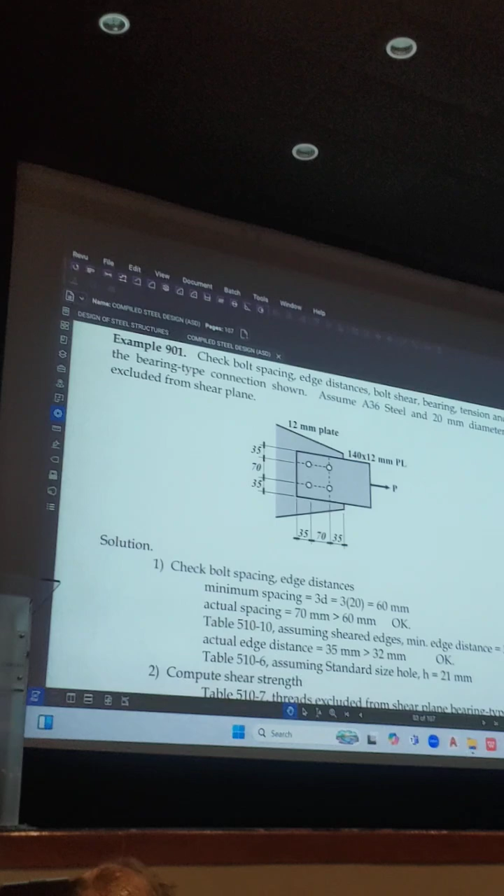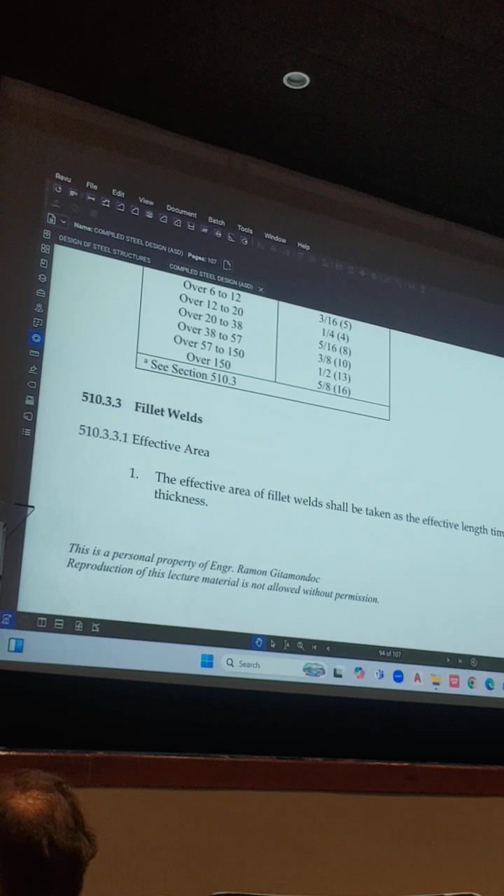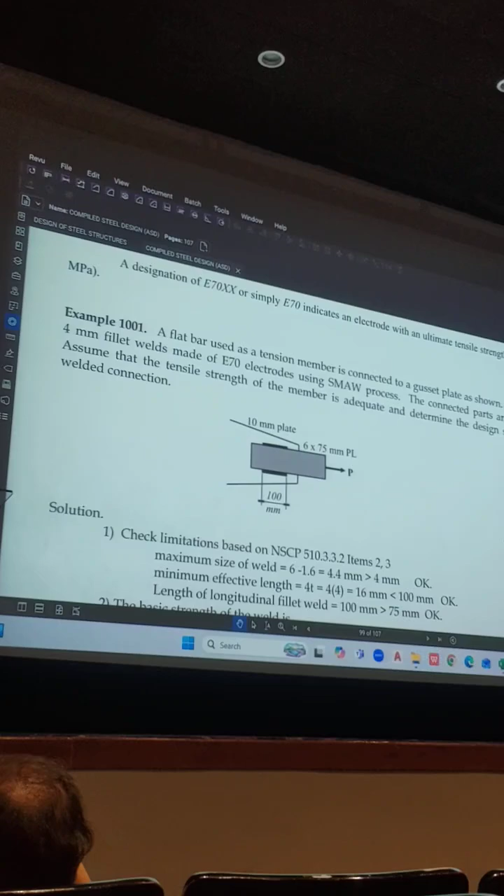Okay, welded connection. So we have sample problems here. Axially loaded members, welded connection. So what theory should we apply here?

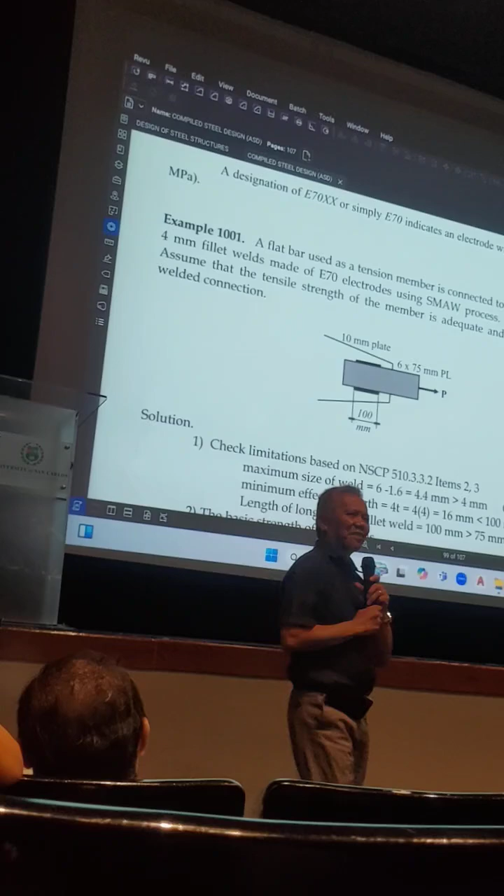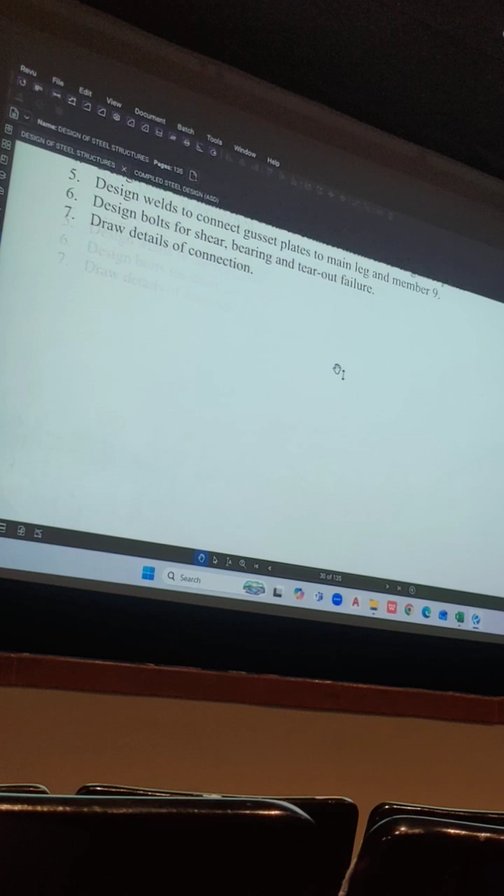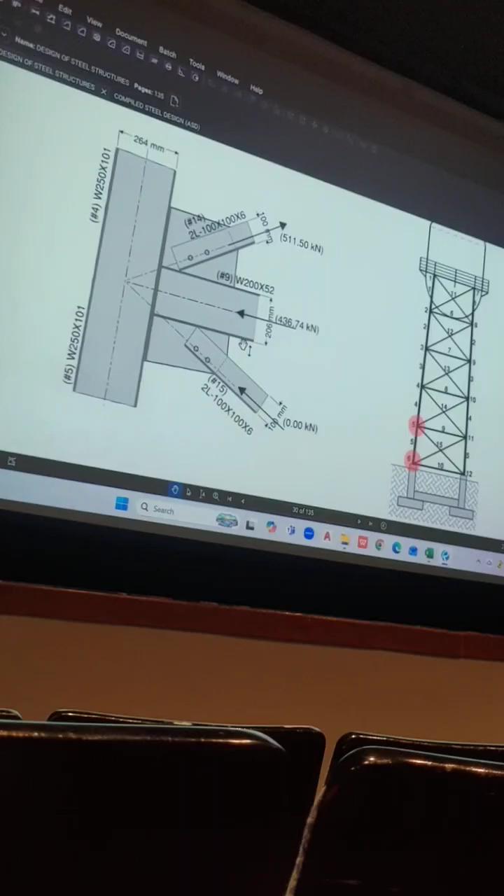This subject has good application, right? So the presumption at this level is that you already learned the theory. So you should be able to apply them, in specific situations.

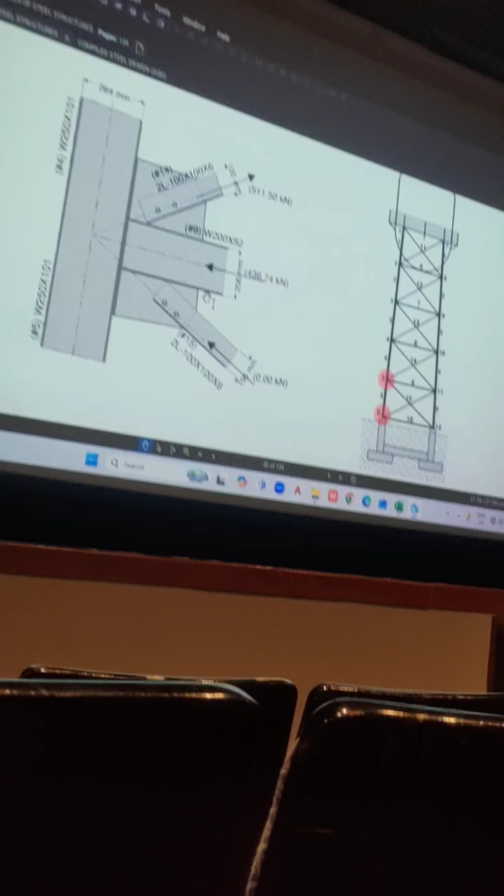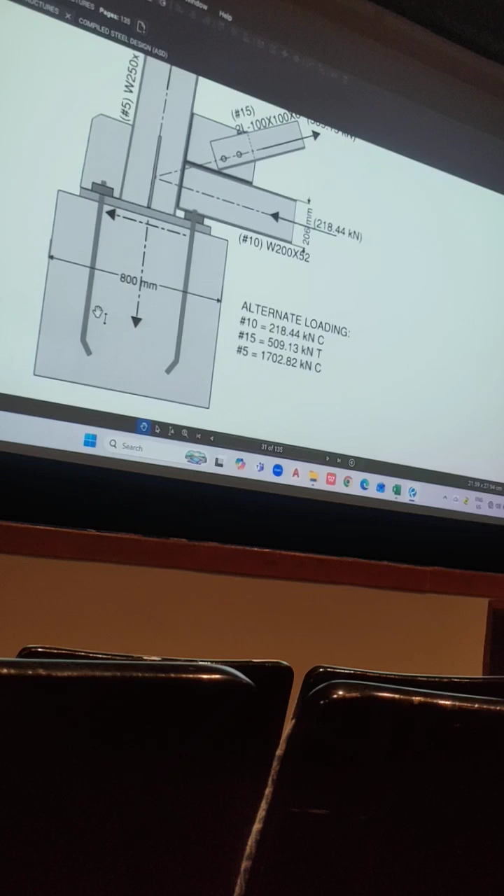This is the connection at the base. So what is your main leg? Here, horizontal diagonal member. And here's the base plate. The base plate is embedded into the concrete pedestal. Actually, not the base plate, but the anchor bolts are embedded into the pedestal.

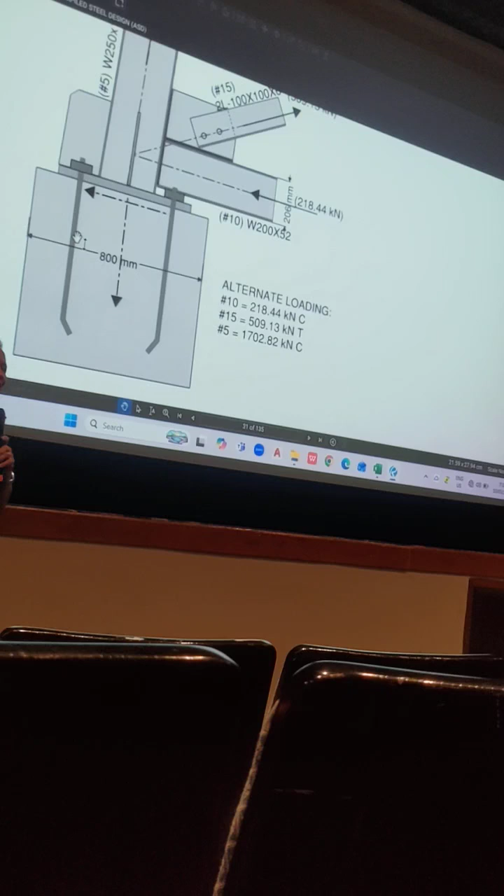So now you must be able to identify what forces the connection is required to resist, what stresses will occur in the connection, in a particular part of the connection. For example, the anchor bolts - what stresses act on the anchor bolts?

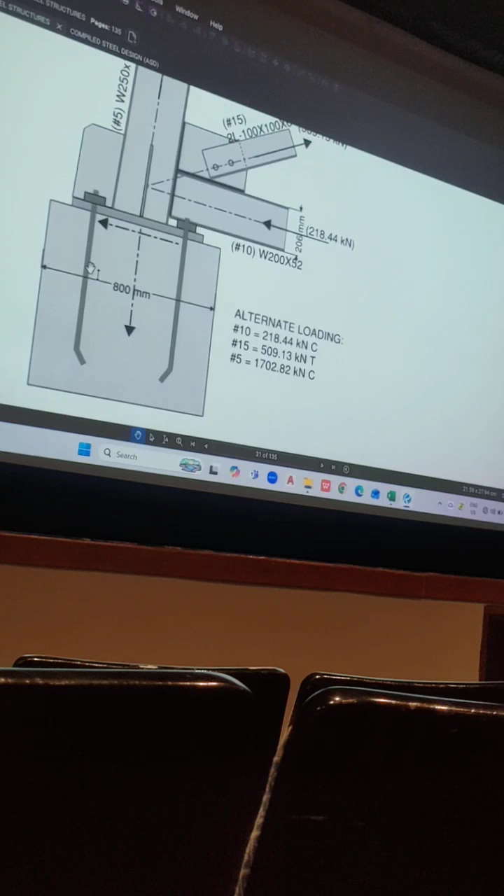Okay, there's horizontal force, so that will be resisted by the anchor bolts in shear. There's also tension, right? So the bolt will also be subject to tension. Okay, so that's for the anchor bolts.

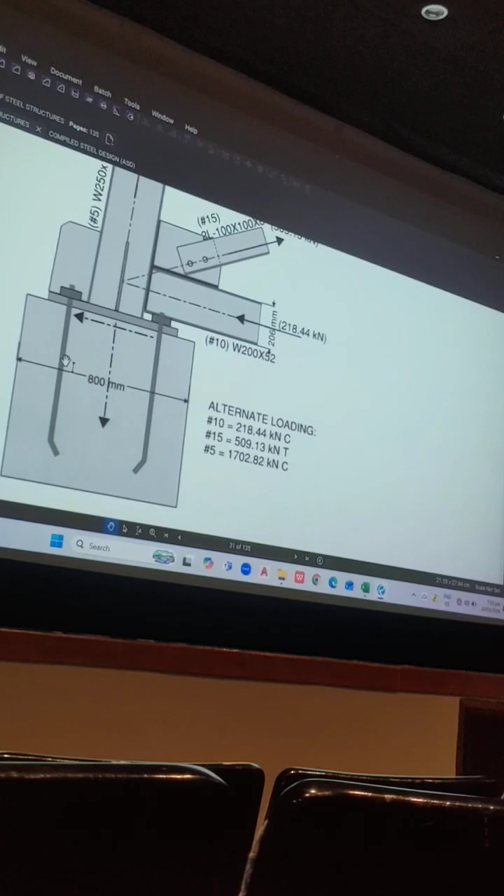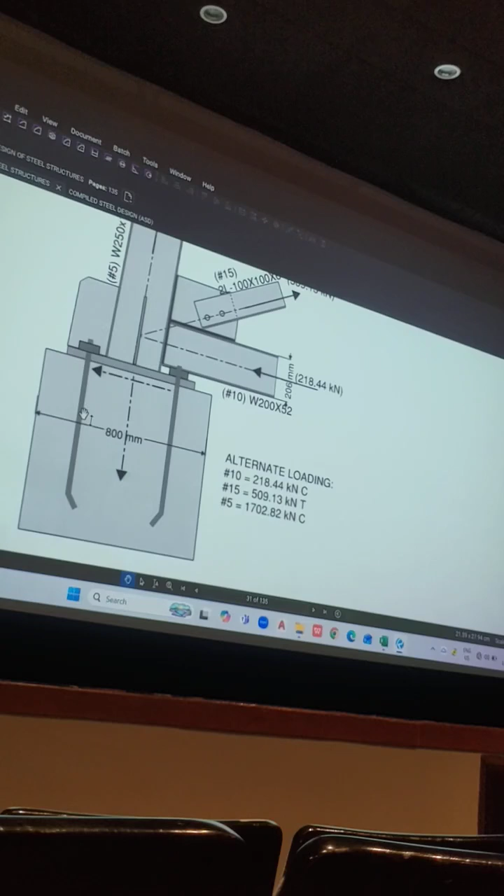For the base plate, you have bending. If it is uplift, the base plate will tend to bend downward. If you have compression in the main leg, then the base plate will be subject to upward pressure exerted by the concrete pedestal on the base plate. So you need to look at two situations: downward bending on the base plate when subject to tension in the main leg, upward bending on the base plate when you have compression acting on the main leg.

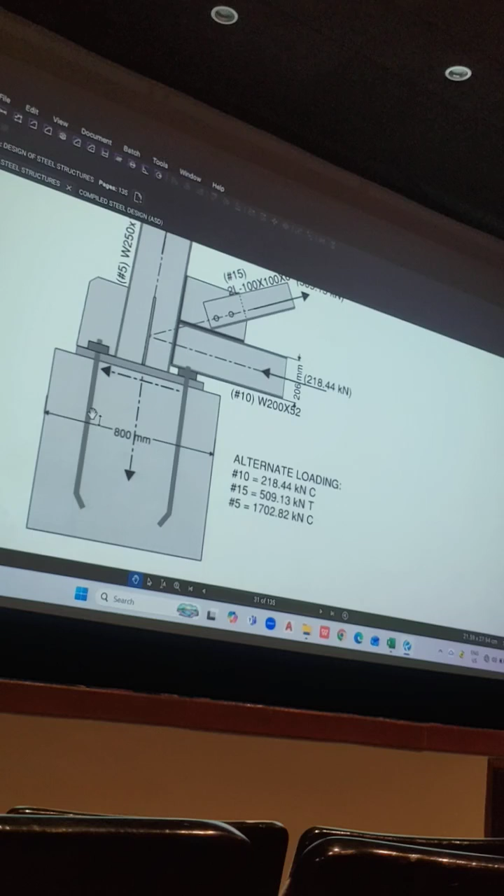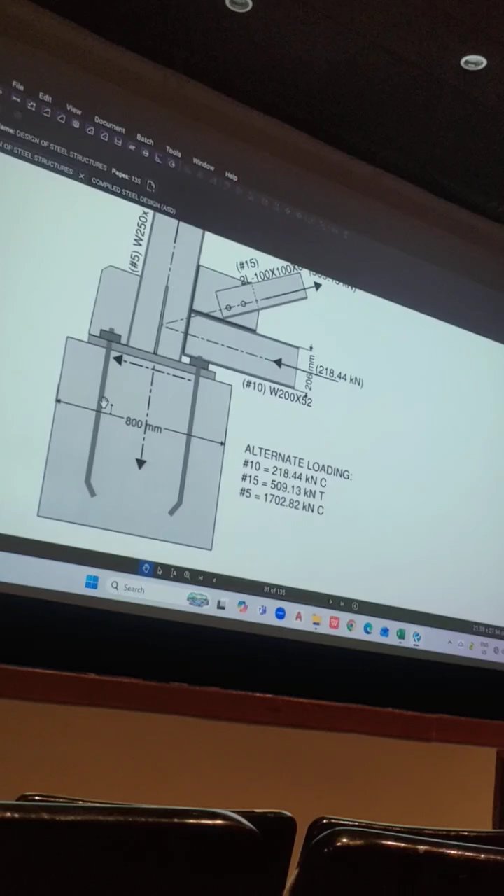In addition, you have bearing stress between the anchor bolt and the base plate, as they come in contact due to the horizontal load. So there will be contact pressure between the base plate and the anchor bolts, and bearing stress between the anchor, the base plate, and the concrete pedestal - bearing stress if compression is the load on your main leg. If tension, there's no bearing, but with downward compression, there's bearing stress.

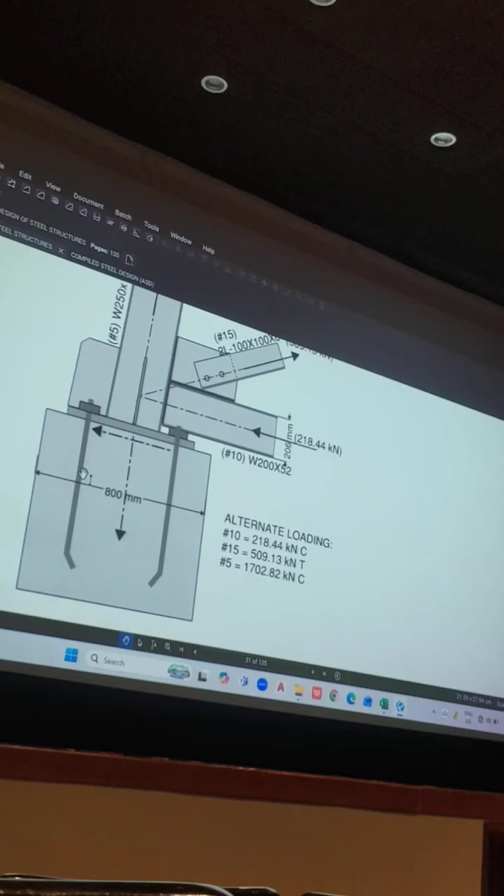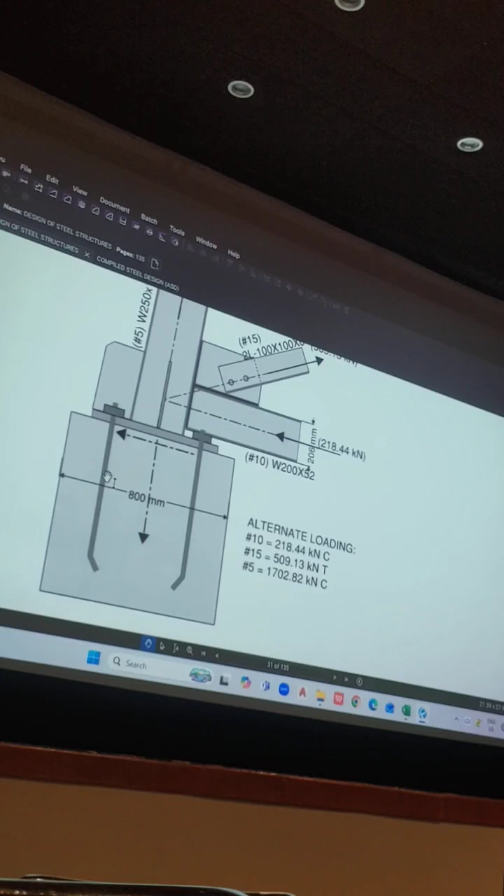You need to be able to recognize: this is bearing, this is bending, this is shear, this is axial tension, this is axial compression, this is torque. If you still have difficulty identifying those stresses at this level...

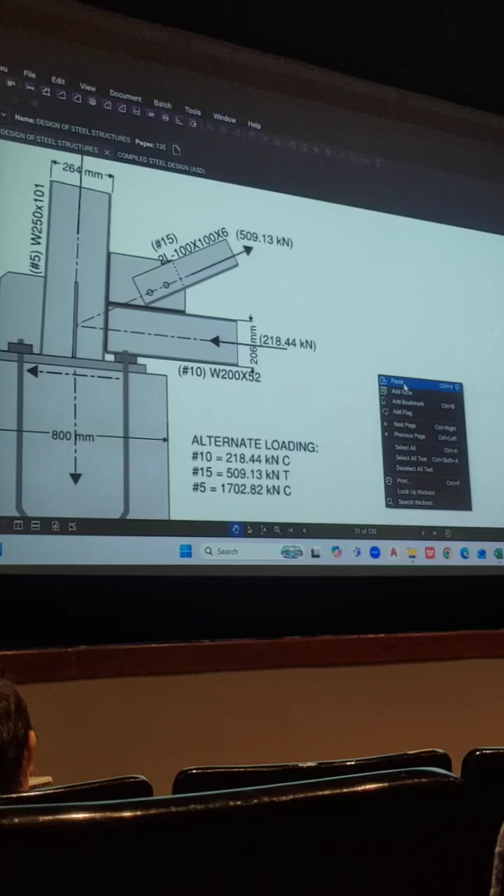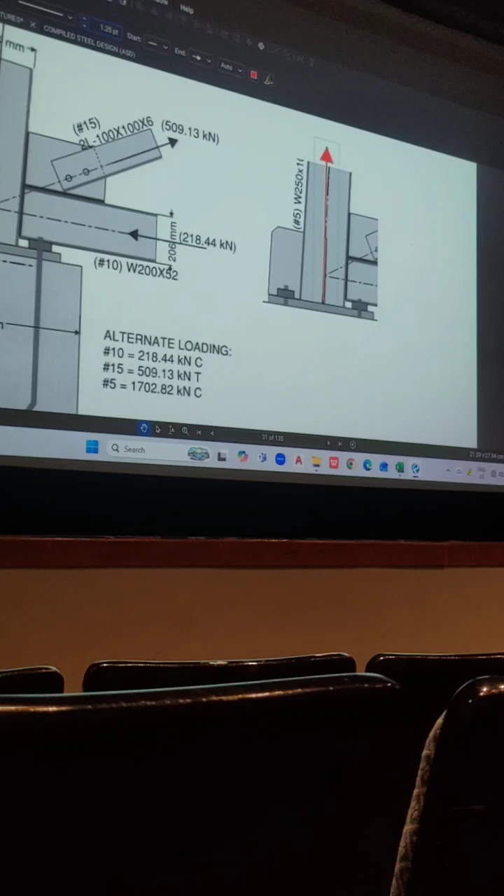For example, we have axial or uplift force here, an uplift force acting upward. We also have horizontal force, let's assume the horizontal force will be acting to the right. So remember that what fastens this to our pedestal are the anchor bolts - without the anchor bolts, the bearing plate will simply separate.